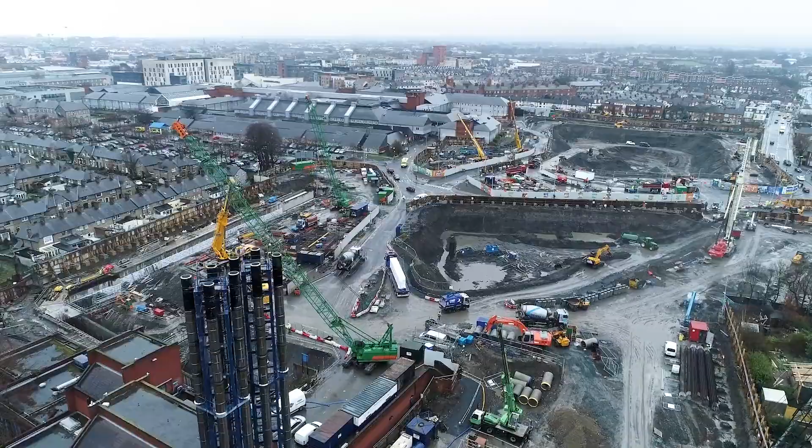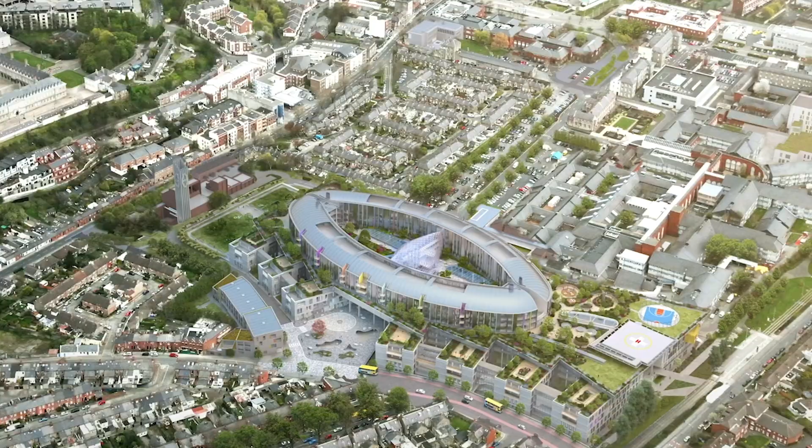When you're finished the project and the hospital opens and you stand back and look up at it, you say, I was part of that. It's really something, and it feels like you're leaving a bit of a legacy behind. So I'm happy to keep doing this for potentially the rest of my career. It's a long journey, but in the end you just have to think about what the finished product is going to be and how wonderful it'll be. This is a standout project in the career of any engineer.

You get a sense sometimes of how important what you're doing is. Ultimately, our client is the children of Ireland and everybody in Ireland, their parents as well. I have young kids myself, and the facilities that are there for them at the moment are not really what we would like them to be in this country. So that's really why we're doing it.

Someone asks you, what do you do? Oh, I work in the children's. Oh, the new children's hospital. Yeah, everybody knows what it is, and though they may not say it, everybody knows how important it is.

I think they talked about building a new children's hospital in Ireland for 40 years or so. And I've always loved healthcare work just because of that. It's complex, it's technically challenging, but also it has that social usefulness aspect to it. You very much feel when you're building a hospital that you're doing something for the greater good.

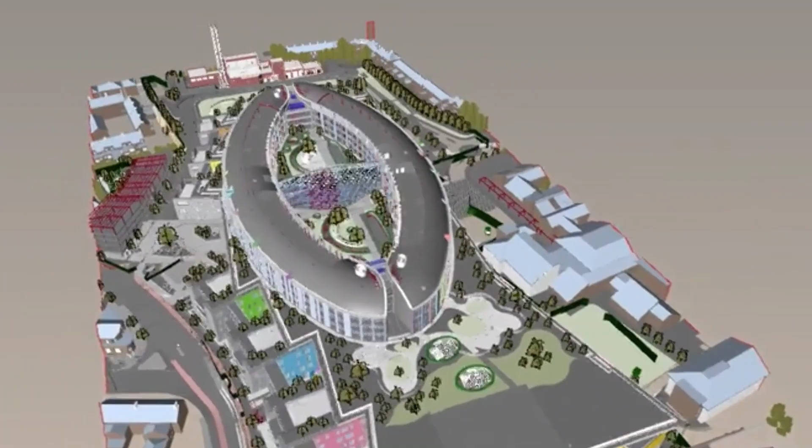But you get a sense sometimes of how important what you're doing is and what it will be. And I see the building coming up higher and higher out of the ground. You get a sense of how grand it will be when it's finished.

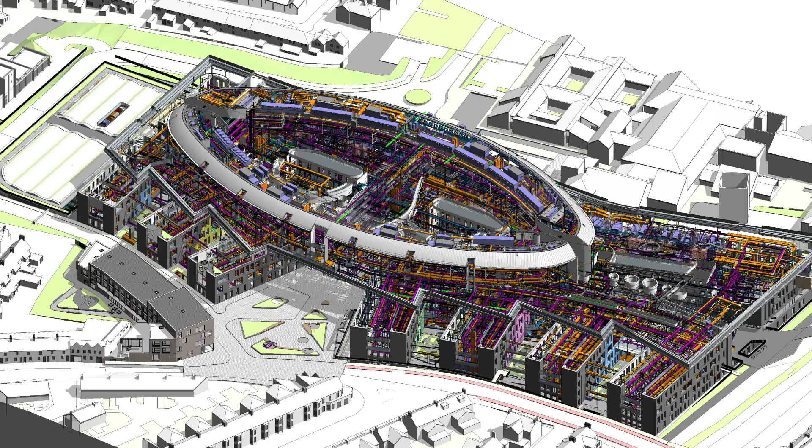So what Jones Engineering bring to this project is, number one, we bring experience, but more than that, we think we bring a culture, we bring passion, and it's a passion to solve problems. It's a passion to get things done right the first time, to come up with a better way to do things. We're always looking to see, can we innovate and can we come up with a smarter way to do something. But it's also a passion to hand over a project that at the end of the day is a world-class facility to the highest standard.

I think my advice to young engineers who are about to graduate is don't limit yourself in what kind of job or sector you've studied your engineering in. They're all quite versatile and flexible. You can switch from one side to another. It is going to take a bit of learning and getting used to, but you're well able to do it. Definitely just don't limit yourself to just your degree and only your degree.

Ultimately, a consulting engineer solves problems. So clients will come to us with problems or challenges. They may want to build a building in a certain place, or a bridge, or design a table, or anything. And it's our job to decide how that might happen. Can it happen in a cost-effective manner? What are the stages that would have to go through to decide, from concept to detailed design to figuring out a price to production, all of those things. So yeah, ultimately our job is to solve problems.

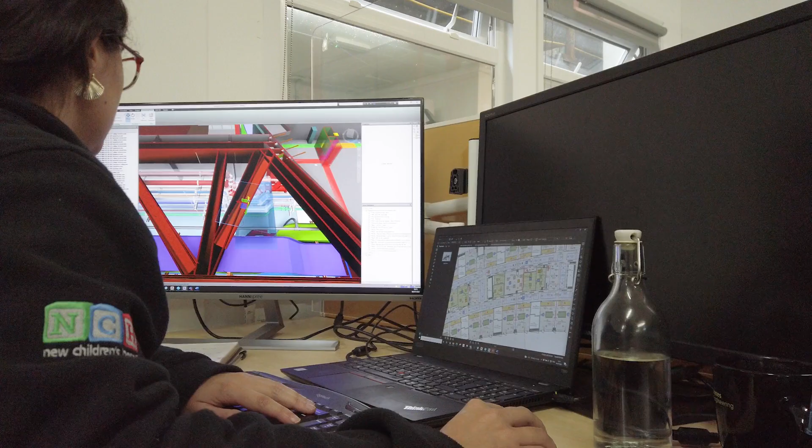I think that many times when we finish college or university we are all very excited about moving into the real world, and sometimes we do believe that we know everything, but it's not really true. Actually, you learn the concepts and you learn how to think, and then you come to the real world, and you are constantly learning stuff.

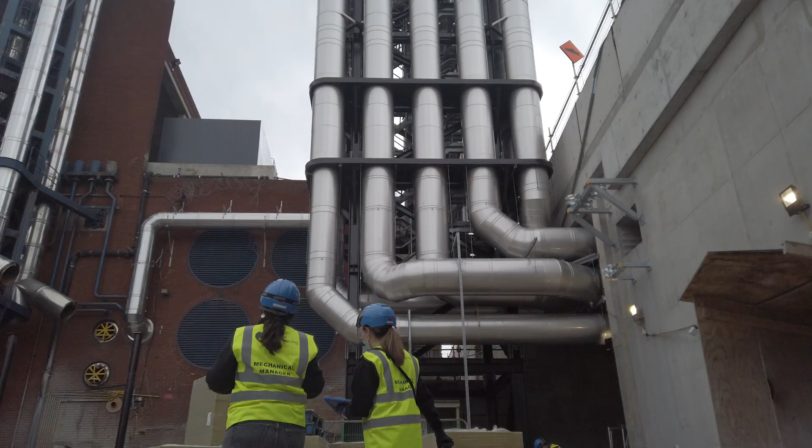And if you have good managers who help you, which we have here, you will start having small tasks, and then eventually they will start giving you bigger tasks, not really on your own, but they give you that freedom of, okay, you have to do this, any question, let me know, but you have the freedom to do it your way.

You have to learn how to allocate time to different things, because there are different jobs within this project, like as a project engineer or as a coordinator, or you have to be interacting with many subcontractors, different trades. You see that it's a huge hospital, and there are many people involved.

I remember when I was in college, or leaving college, I didn't really understand the different roles that were out there in the industry. You could be a consulting engineer, you could be a contractor, you could be a manufacturing engineer, you could be a technical sales engineer. I had no idea what they were. I took a job, my first job was a technical sales engineer, and I just saw it as an engineer, you know. And that turned out to be a really interesting job, which I did for a couple of years.

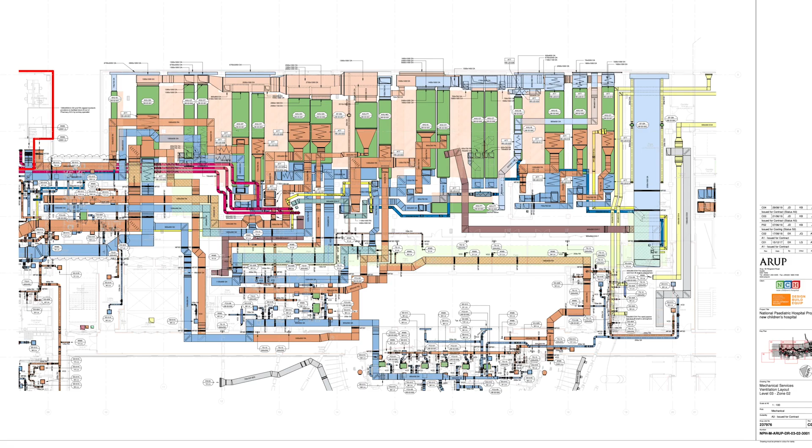But ultimately, the difference between the roles is consulting engineers predominantly design. It's more office based. We spend time on site. As you can see now, I'm on site and have been here for quite a while. But predominantly we're office based, and we produce designs normally in the form of drawings. And then our colleagues, the contractors, actually take our designs and make them into a reality by turning them into fabrication drawings and constructing them and managing the works on site. So that's the fundamental difference between consultants and contractors.

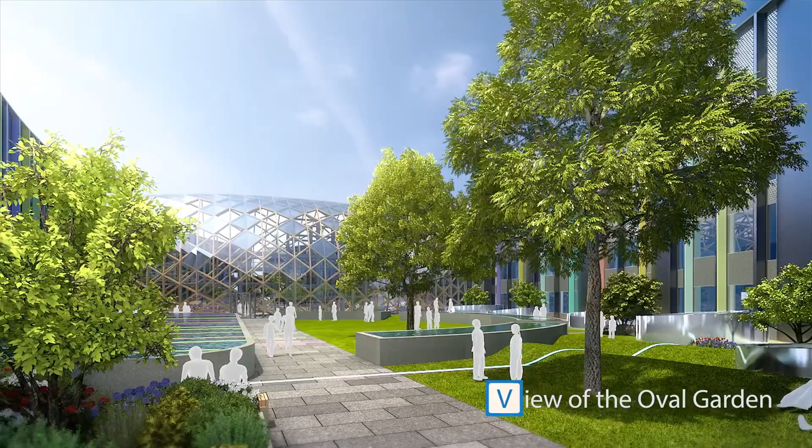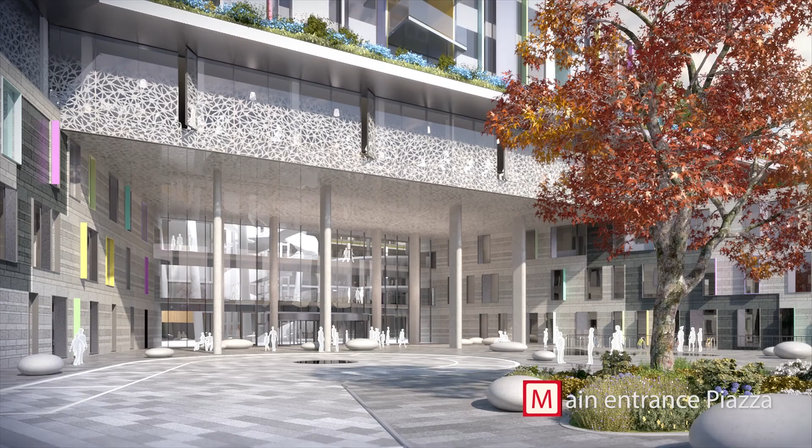And it's a departure, I think, in the design of hospitals in terms of it's all single rooms, so there's no wards. So there's lots of privacy for the children and their families, and in each room there's a bed where a parent or a friend can stay the night comfortably, and that's really important for children. And the whole design is very much focused on their well-being, with lots of light and lots of outdoor space, and all of that hopefully would help the healing process and help them feel more at home and more relaxed in a hospital environment.

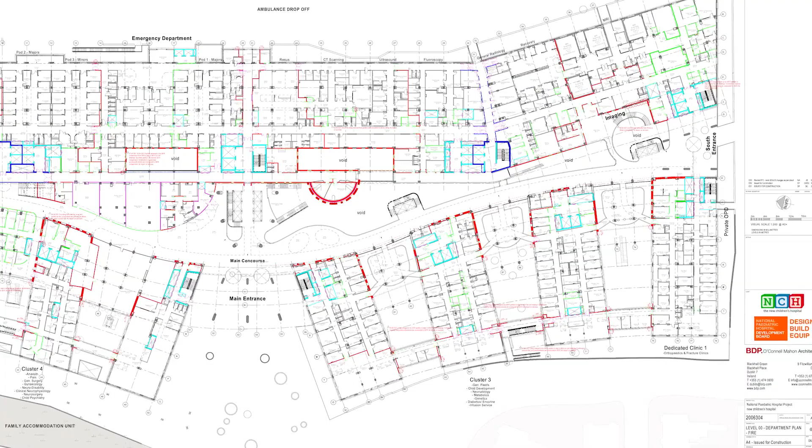So just a little bit about the project itself. I've been personally working on the project for 6.5 years, and I'm really proud to work on the project. I know Arup as a company, we're really proud to work on the project. We pride ourselves as a company that does socially useful work, and no better work to be doing than delivering a hospital. It might sound a bit corny, but I mean that it's really interesting and fulfilling work to do.

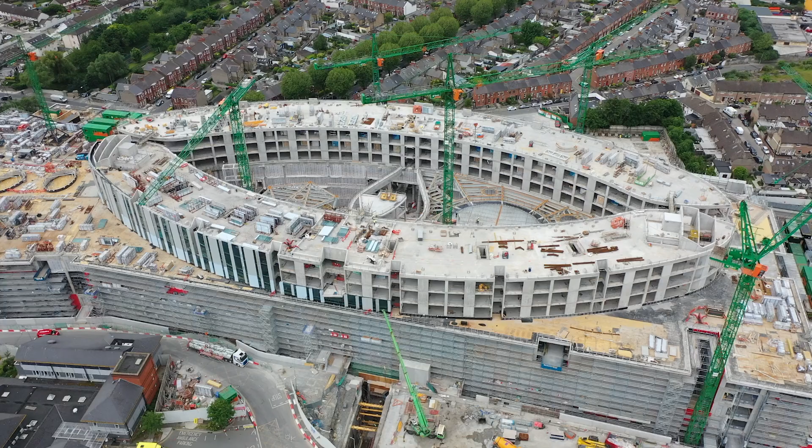I could be delivering different types of projects if I wanted, but I've worked on hospital projects for most of my career, and I think I'll continue to work on them for the rest of my career. They really are interesting projects. They're very technically challenging. They're very complex projects to work on, and when you've finished the project and the hospital opens and you stand back and look up at it, particularly this hospital now, and you say, I was part of that, it's really something, and it feels like you're leaving a bit of a legacy behind. So I'm happy to keep doing this potentially for the rest of my career.

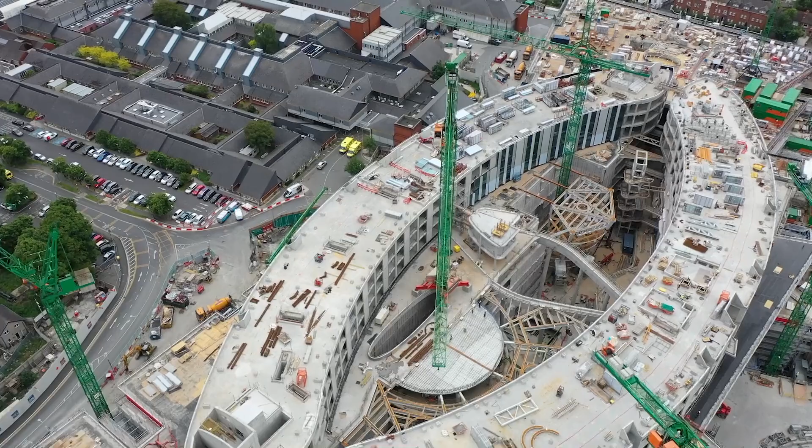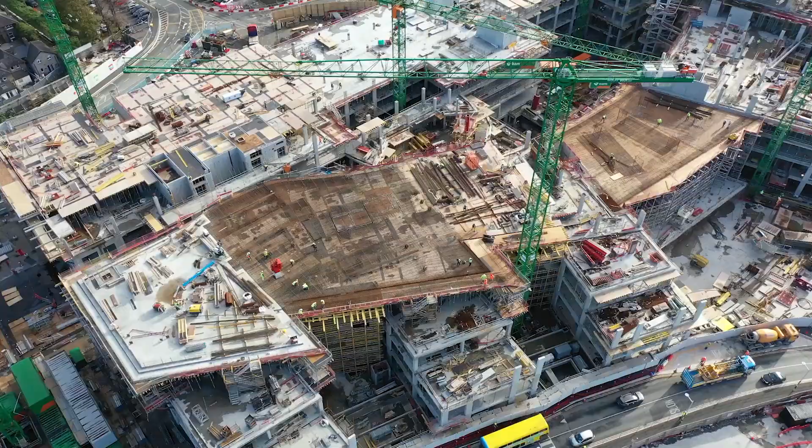The hospital itself, I'm not sure people understand the complexity of it and the enormity of it. The building itself is 160,000 square metres. It's got 6,000 rooms. If you try and imagine 6,000 rooms, that means there's over 25,000 internal walls. Those kind of numbers make the mind boggle. They don't mean an awful lot to people. Your average house, for example, is 150 square metres. So it's over 1,000 of those.

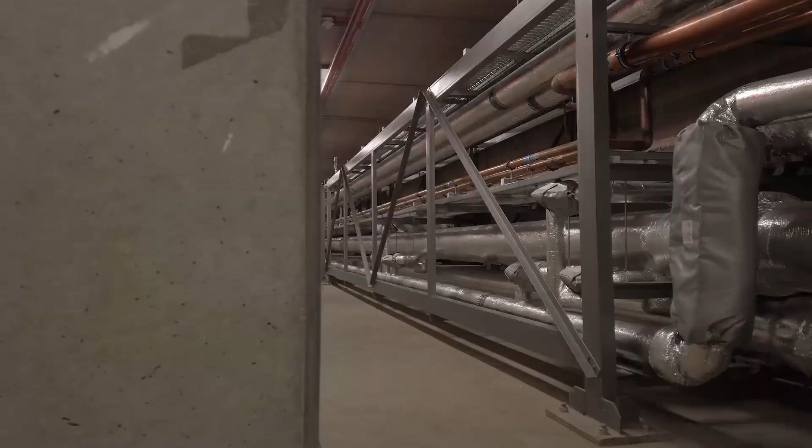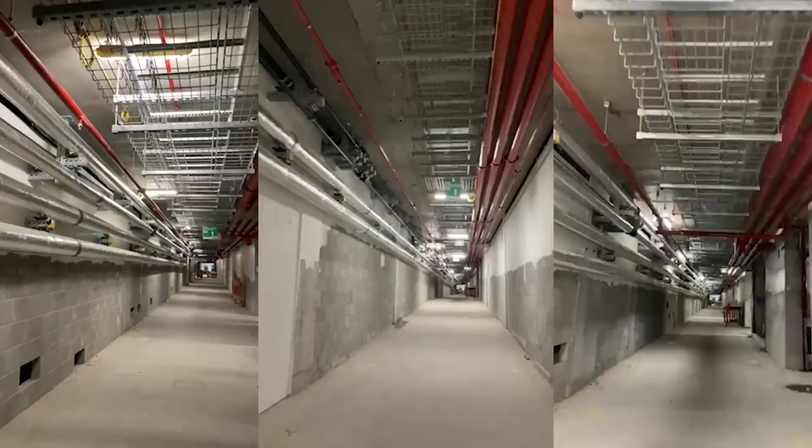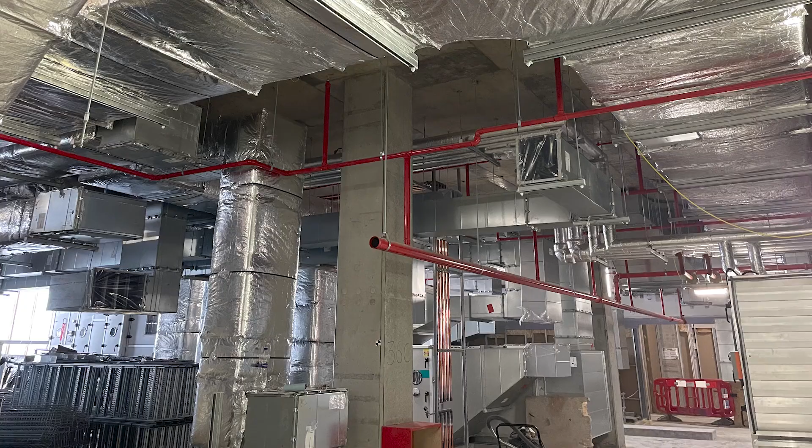There's over 15,000 square metres of plant rooms alone. If you take any of the large commercial office projects in the city centre, the overall building area of those will be maybe 15,000 square metres, probably less. And it's like taking one of those and completely filling it full of mechanical and electrical plant. And that's just the plant rooms. We also have to design all of the arteries that connect the plant rooms to the end user. So there's any number of outlets in any of those 25,000 walls with electrical services, with medical gas, with very clean water to help wash people's blood. Everything you can imagine is in this hospital.

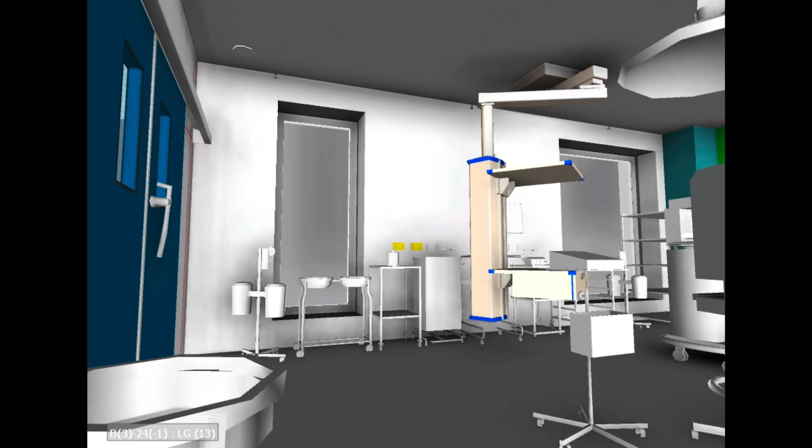So it's our job as designers to design all of those services for the hospital, from the plant rooms right up through the distribution, to get them to rooms so that ultimately patients, who are our ultimate clients, are getting the treatment that they need. The building has over 5,000 rooms. There's 22 operating theatres. There's over 80 isolation rooms. There's 130 air handling systems. There are over 30,000 data outlets in the walls. The building is phenomenally complex and really, really interesting to work on.

If you're an M&E designer, I don't think there's much that a hospital hasn't got. It's got offices, it's got operating theatres, it's got ICT rooms like data centres, it's got kitchens, it's got restaurants, it may have a cinema. It has everything really that you could want to design, and plenty to keep you interested.

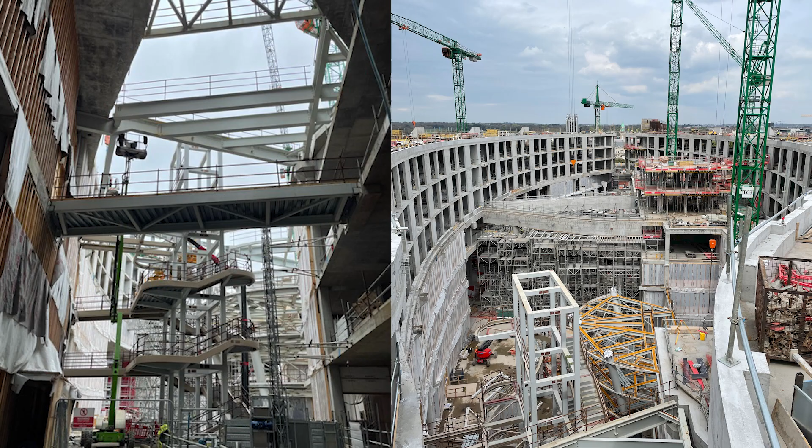So Arup were appointed to start work on the Children's Hospital in 2014, and I started working for Arup on the project towards the tail end of 2014. So it's a really important commission for us, and it's a project that we're really, really proud to be involved in and committed to delivering. It has been tough at times, but we're really seeing the fruits of our labour now out on site.

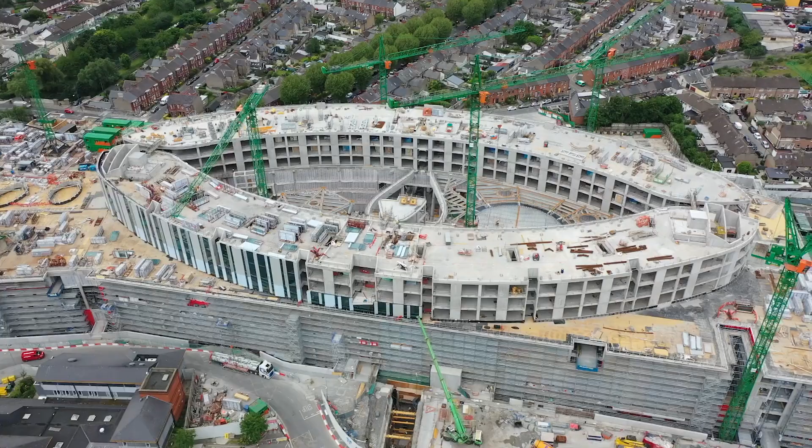The building is now up to level 7, so the structural frame topped out last month, which means that the superstructure is largely complete at this stage. And that's something to say as well.

Over the years, we've had plenty of social events. The team working on this project, the guys in this building, as well as our own office and in BAM's and Mercury's offices, we've all been working together for a long time now. And we're okay, we have our disagreements, but we work together well the majority of the time, and we really enjoy it.

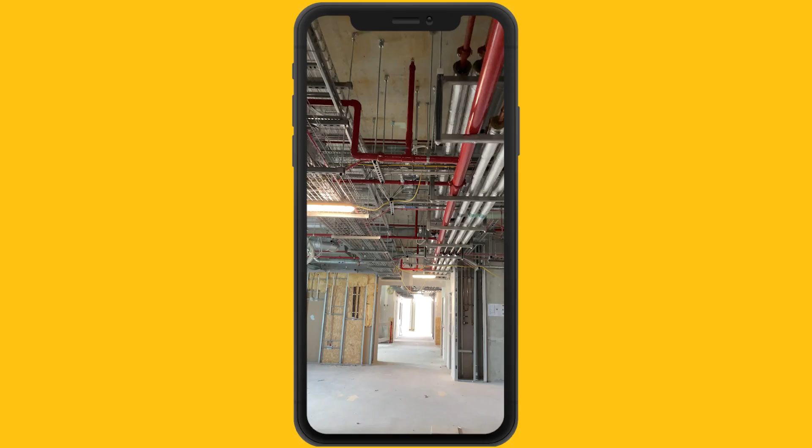So the M&E fit out now is reasonably well progressed. It's probably 20% through at the moment, and there's quite a way to go, but there's a lot of activity out on site now, so it's quite an exciting time to be based on site. And as you can see with the Luas going by now, that's one of the things we have to deal with.

Yeah, so the location here was certainly challenging in terms of the footprint that was available for the building, and it was well, I suppose, publicised that there was doubts about the site and whether it was the right site for this building. And it's not our role or my role to question the site itself or the location of it. It's our role to come up with solutions to make the building work on the site, and in fact to make the site work for the building as well.

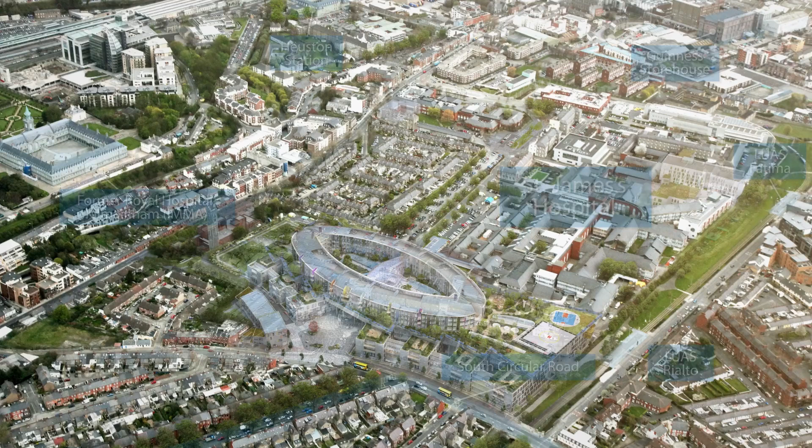The site, obviously, it's a live hospital campus. So there's hundreds and thousands of patients coming into this site on a daily basis, and St James's Hospital could not be affected by anything that we had to do. We couldn't shut down the hospital or any part of it. They had to provide service to patients 24/7, as they do always.

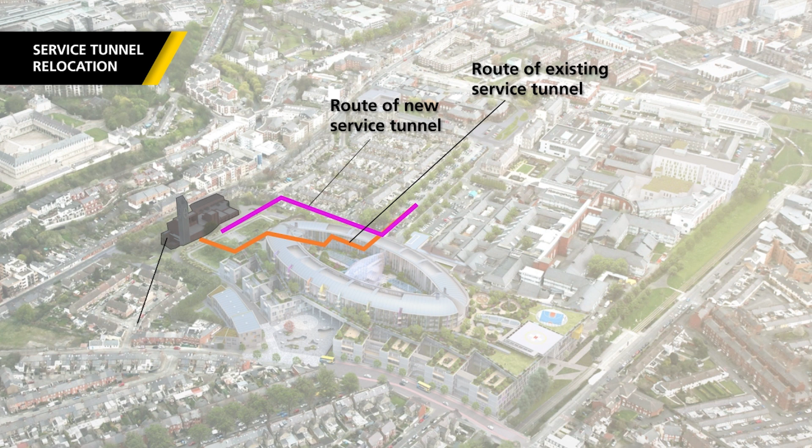And the really unique part of the piece of work that we're going to talk about today is there was a utility tunnel that connected the St James's campus to its energy centre, which is, if you think about it, almost like an umbilical cord, and it transfers all of the critical services from where they're generated to where they're needed. So that's power, keep the lights on, keep all of the machines on, it's heat, it's steam, it's medical gases, it's oxygen, people are acutely aware of how important oxygen is these days, and nitrous oxide, and various other critical services.

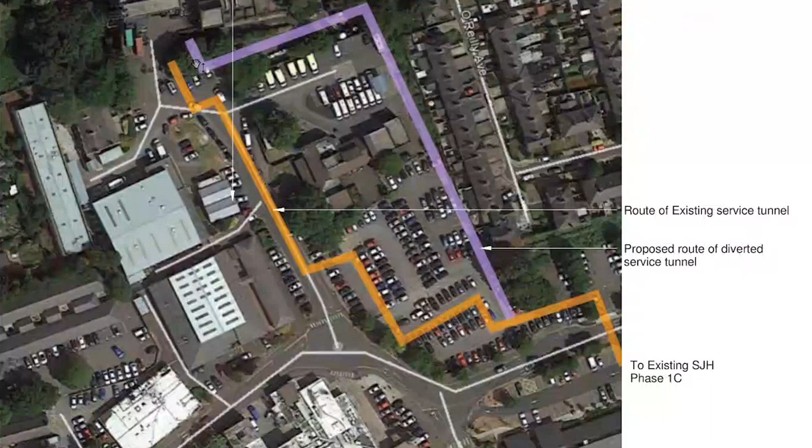And the problem that we're talking about today, that we had to work together with Jones Engineering to solve, is that this tunnel ran through the site for the new Children's Hospital. It ran underground and directly through the route where we needed to excavate to get this building started. So before we could even start, we had to crack this particular challenge. Initially, it's about coming up with a concept, right? So that's really our role at the start.

I heard people say that this couldn't be done. I'm pretty sure I read it in the newspapers actually, that this couldn't be done, that there were so many critical services, the Drimnagh sewer and the utility tunnel running through this site, that it just wasn't suitable for this hospital, and it would really be an almost impossible challenge to do what we had to do. But our job is to make that possible, right?

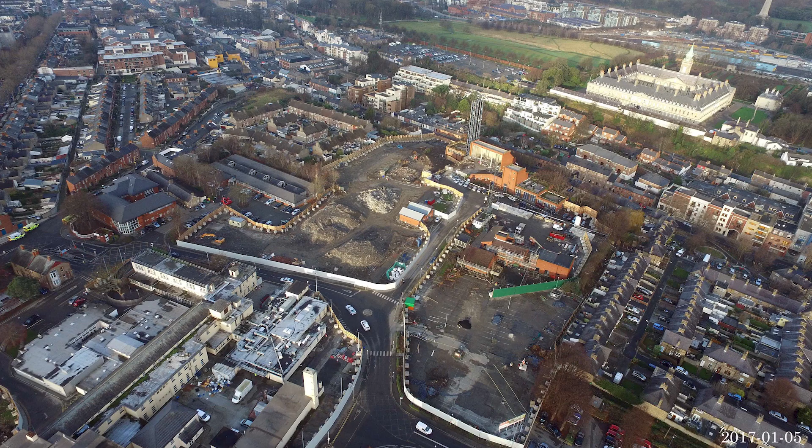The first thing that we do is we go and visit site. So it's hard to imagine, but there was a first time that I visited this site, and it was about 6.5 years ago at this stage. It was cold. I remember there was 22 old buildings on the site where the hospital is being constructed now, and there was obviously this utility tunnel running underground through the hospital. So the first thing we do is we go out, we survey the site, we familiarise ourselves with where everything is, where everything connects into.

Obviously we bring in some specialist companies to help us survey underground to try and figure out where everything is going, where it starts, where it ends, and that allows us to build up a picture of what the specifics of the problem are.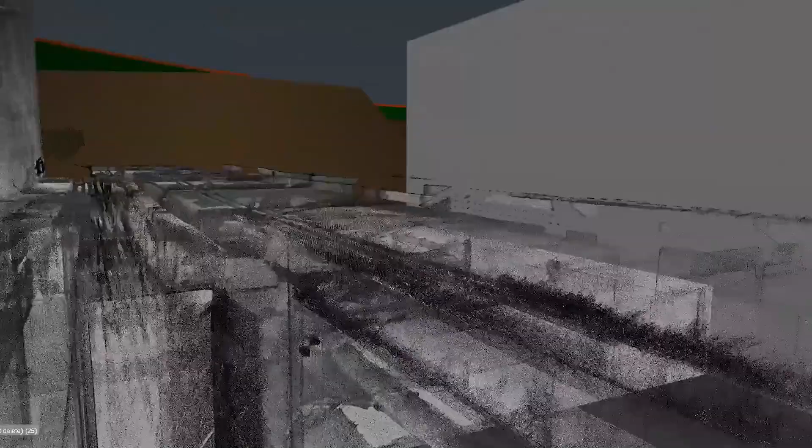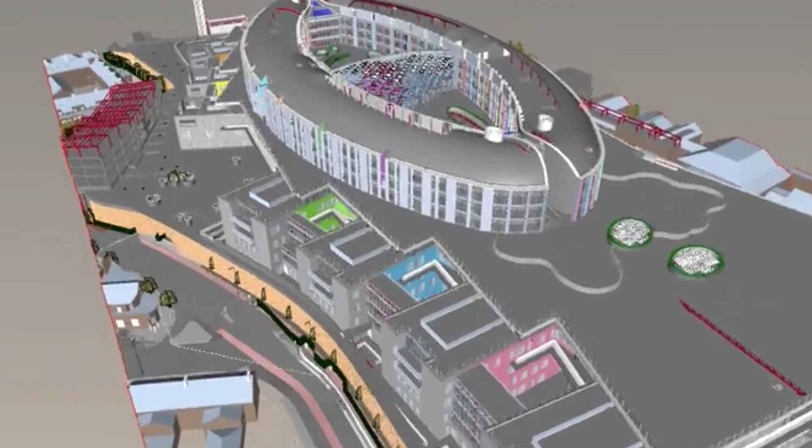And I often think it's almost like a photograph that has very poor resolution. So we start with a concept which is the bones of a solution. It's not very detailed, the resolution is not very good, and as we move through the stages of the project, the resolution gets better, gets better, gets better. So we learn more, we provide more detail, and by the time we get it to the stage where it's ready to be constructed, we've got pretty much all of the detail. We've got everything that the contractors need to build.

So yeah, there would have been an initial information gathering stage, let's call it that. And ultimately, if we imagine a situation where we have an underground tunnel running through a site that we need to clear, I think any of us here could come up with the initial concept. The tunnel has to go around the site. So we looked at a couple of potential routes as to where it would go, and we decided pretty early that the tunnel needed to run east to the northeast corner of the site, and then south to join back up outside the footprint of the new Children's Hospital. And so that was the initial concept 101.

What we had to do then is try and understand, okay, now I've got an idea, is it feasible? So we need to produce what people refer to as a feasible generic design. So it needs to work, it needs to be possible, and it's based on generic components. So we can't specify it must be that exact type of machine. We've got to be able to do it in generic terms so that the contractors can procure from different sources. Okay, that's something we have to work within.

So now we've got an idea and we start to develop: okay, well, are the levels correct? Can we get the tunnel physically far enough underground, and will it bump into anything as it's coming along that route? And if it does, how do we divert that? So we go through a whole stage of working with other consultants then. We work with the architects, the civil engineers, the landscape engineers to try and figure out if our initial concept is actually feasible.

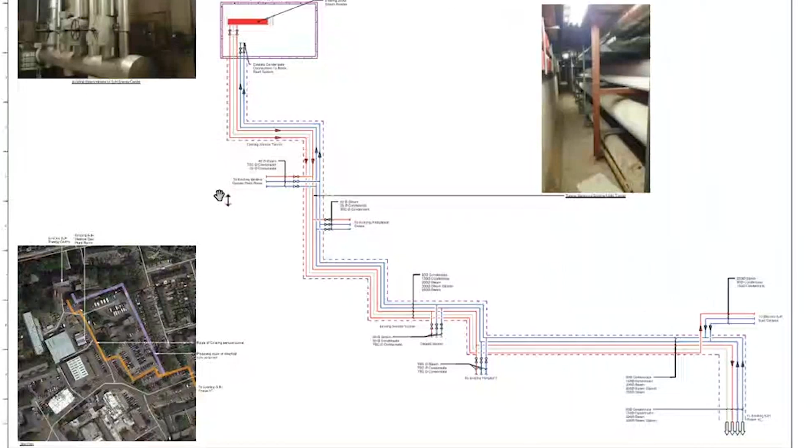And so we had to survey the St James's Energy Centre to see, is there a part of that building that's low enough that we could feasibly break through the wall from underground and create a new tunnel and connect everything back. And so we determined there was, we picked a location, and we came up with an initial set of concept design drawings, which we used predominantly to agree the scheme design with the key stakeholder at this stage, which was St James's Hospital campus, because they own the services, they're keeping their hospital live, we're doing open heart surgery on it effectively, and we needed to get their agreement with everything that we had to do.

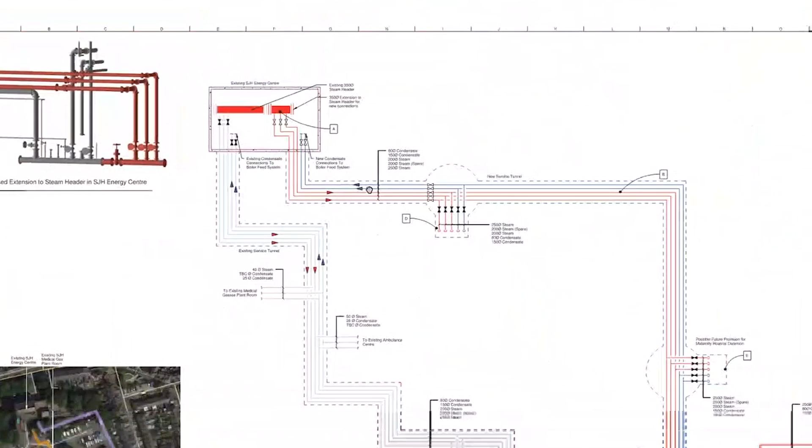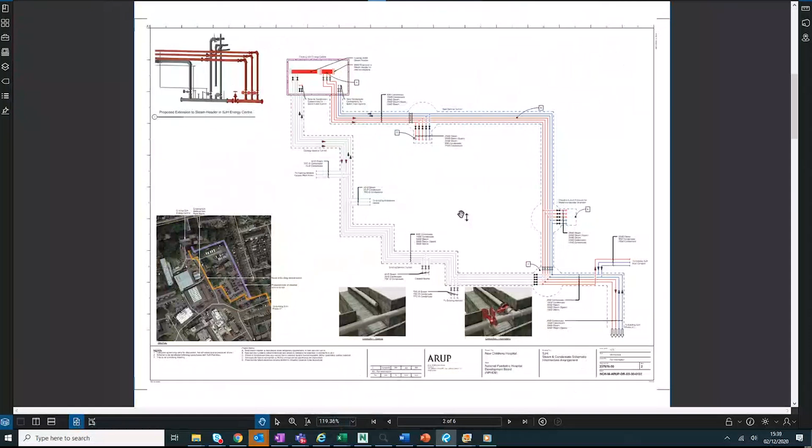We produced an initial set of concept drawings for all of the main services, so for the electrical services, steam, medical gases and so forth. And we set them up in a way where we showed schematically existing, the next page would be proposed intermediate stage, and the next page would be the final stage. It's very basic, but you could flick from one sheet to the next on a projector, and it was very clear to this client what was changing at each stage. So, we would add a new bit, we would make a connection here, we would run services here, we would make a changeover at this point.

And we had to demonstrate to St James's that we could do it in a way that would be safe, and that it would not cause an interruption to their operation of the hospital. That was just a no-go. We could not do that. We couldn't interrupt the services.

And we had to give them confidence that we had designed it in such a way that this could be carried out as we had designed it. So we sat in long rooms like this with our drawings up on the screen. All of the people from the St James's Technical Services departments, their Director of Capital Projects, all of the key people over there, including clinical people as well. So you would have some of their clinical engineering leads and people who understood what it meant if their oxygen supply turned off, for example.

Yeah, so to give the St James's team confidence that the solution that we had come up with was buildable and could be implemented in the timeframes that would avoid any downtime on their systems, we collaborated with contractors prior to having the meetings, and we were able to demonstrate that we had thought through the turnaround times for controlled shutdowns and for switchovers between one service and another service and backup services and that type of thing.

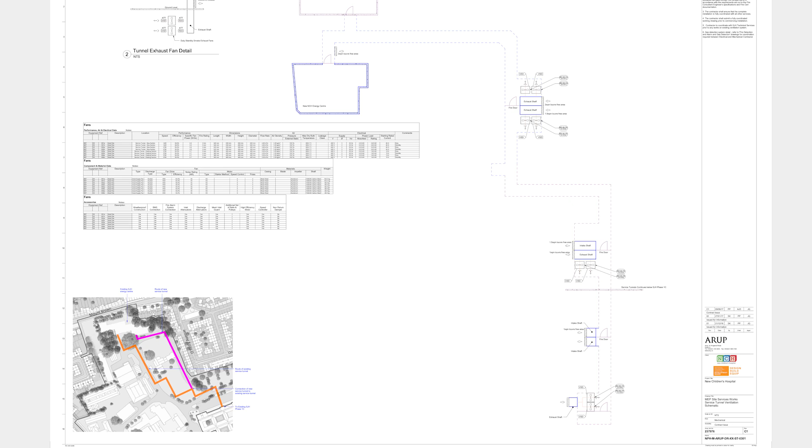Okay, so really where we're trying to head here is to try and engage. We want to be able to now contract this piece of work to a team of contractors who can actually implement it. So the next stage of the project that we need to move to is developing a tender design. Okay, and what tender means basically is a design that can be priced, it can be costed. Contractors can provide a price to go and deliver this piece of work, because now that we have a concept agreed and we know where we're going, we need a contractor now to build this for us.

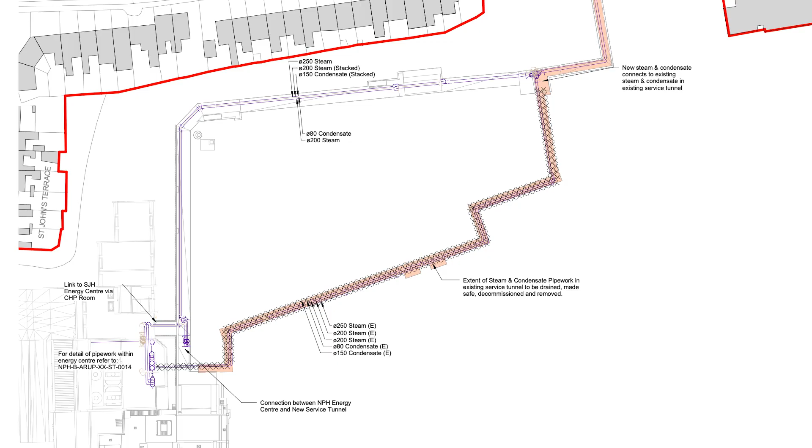And with public projects, the way they're procured, you've got to advertise it online. You let contractors tender for it in a fair way. And we need to produce a very detailed set of design drawings now, or tender drawings as we refer to them, so that all of the contractors get all of the same information and that they get a period of time to assess those drawings, measure them and come back with a price.

So all of the contractors submit their prices for the work, and the contractor with the most economically advantageous tender wins the project. So not necessarily the cheapest, they have to demonstrate that they've thought through the methodology of how they're going to approach the works, and they get points for that, as well as getting points for having an economically attractive tender as well.

So we need to take our concept drawings at this point and develop them into something more detailed. So we need to add all of the valves, we need to add all of the right pipe sizes, we need to add all of the material specifications, we need to add all of the accessories that aren't necessary at concept stage. So when we're agreeing a concept with the stakeholders across the road, they don't really mind if there's 2 sets of expansion bellows or 1. They just know you've got to have them, you've got to have thought that through.

But for tender, you've got to have designed all of the valves, all of the accessories, so that they can be counted and all of the contractors can price them in a fair and an equivalent way. So it's taking the concept and it's developing it into a detailed set of drawings that plugs all the gaps.

And as well as your drawings, you produce specifications, which are documents which list out all of the material specifications, all of the constraints, all of the duties that the contractor must carry out, everything which will cost money effectively, and everything which is required to complete the work. So we prepare a big pack of drawings and documents, mechanical and electrical, which go together and they're sent to the contractors to price.

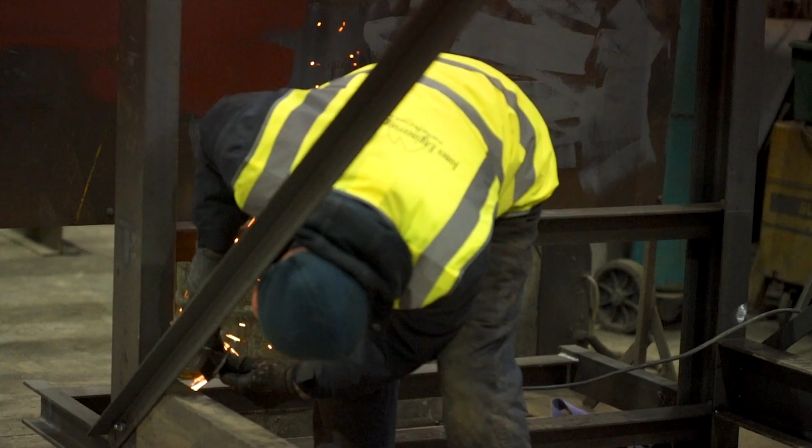And if you take the likes of the utility tunnel that we worked on here, the major concept really was modularization, and that's mainly based around speed. So are you going to just get all the materials delivered here to site, or are you going to actually get them delivered elsewhere, put ours off site and bring finished elements to site? And it sounds slightly trivial, but that's a major decision you're going to make.

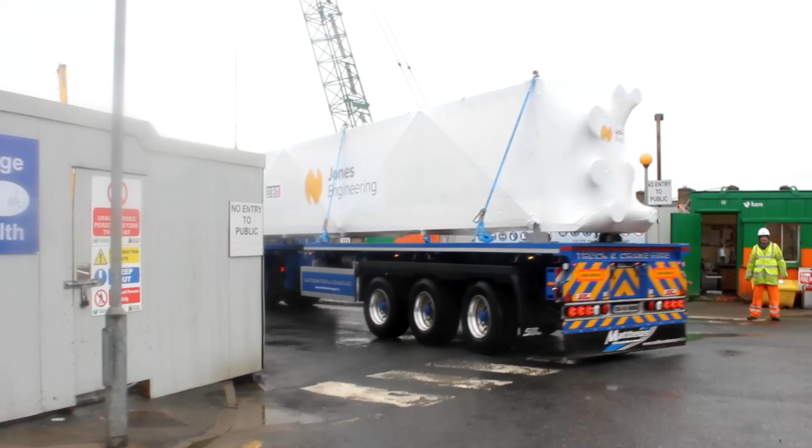You're going to need off-site premises, you're going to need insurances, you're going to need logistics, additional transport over and above. The level of coordination that's required is going to have to be probably an order of magnitude higher, because everything has to come correct. There's no bring it here and sure we'll fix it, because that just defeats the purpose of what you were trying to do in the first place.

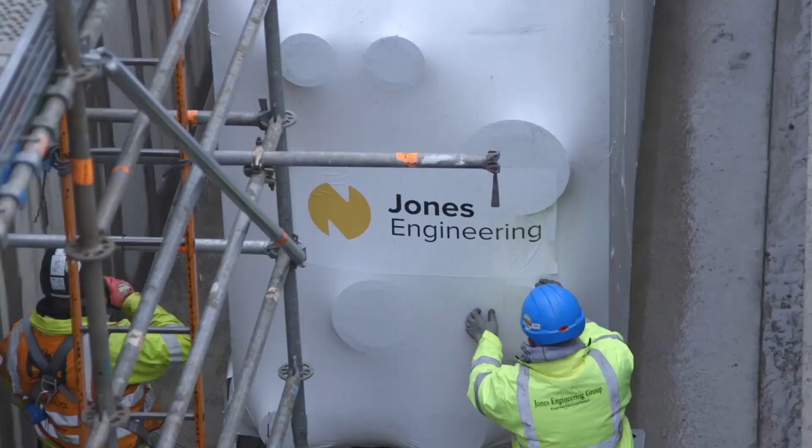So more and more as the industry tends to go in that direction, the more and more accurate you have to be. People coming straight out of college, there's not really much time to come up to speed. You've got to kind of be there from the get-go and get in with a more senior engineer and do your best to play catch up and roll with them.

Yeah, so one of the things that we try to employ when we are doing a review of the design is a simplification of it.

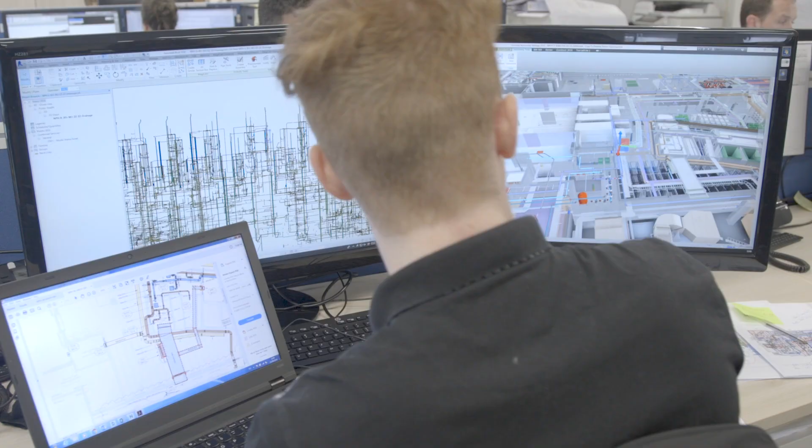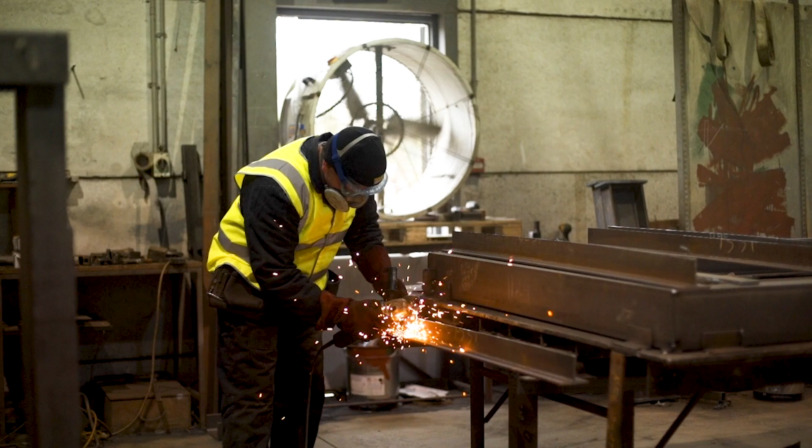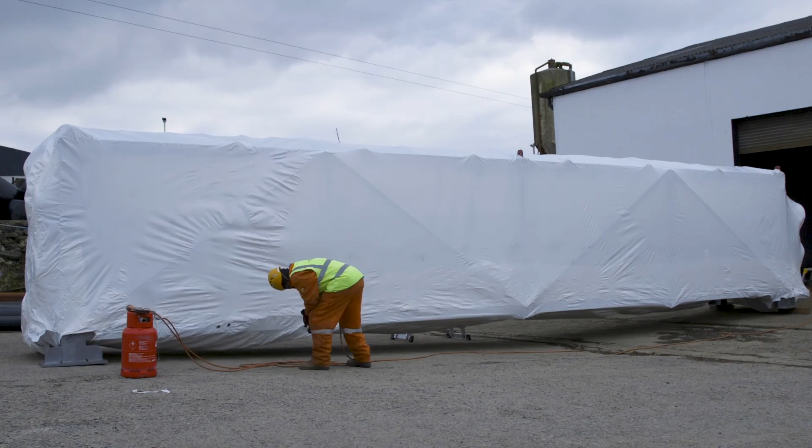A pipe that runs in a straight line is far simpler and easier to install than one that has multiple changes of direction. From a cost point of view, but also from a system operational point of view, there are benefits to everyone from simplification. That really leads into how we think about offsite fabrication, where we're endeavouring to provide compact, repetitive items delivered to site, high quality, low issues. The simpler we can make these things, the easier it is to repeat them, the fewer issues you have, and that leads to higher quality and reduced time overall.

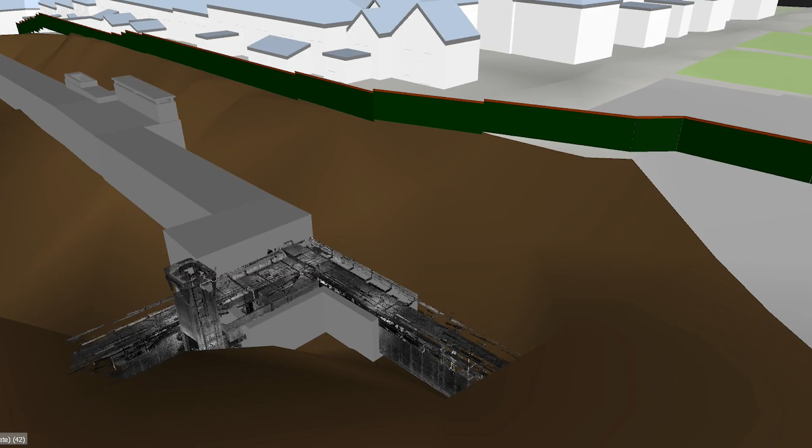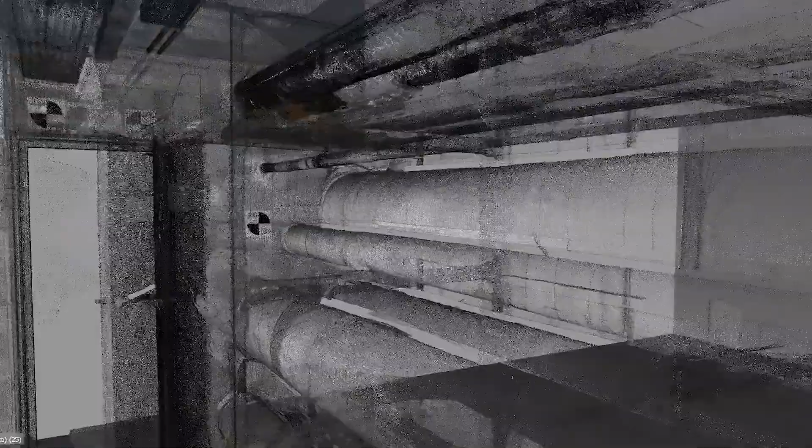To facilitate the speediness of the shutdown works, we needed to prefabricate as much pipework as we could. In an already installed environment, it's very difficult to provide accurate prefabrications because you're relying on what you can see and measure and the accuracy of that. So the entire junction where the cut-in was going to take place was 3D scanned with LiDAR, and this provided us with an accurate base point that we could insert into our model. We probably saved in the order of 4 to 6 hours of work on site, and that's 4 to 6 hours of real time of a hospital losing their heating system that was saved.

In the case of this project, off-site manufacturing was deemed an absolute necessity over a nice to have, due to a number of factors: the restrictions in and around this relatively tight site, but also, and more importantly, from a quality point of view, where it's far easier to control quality in a controlled off-site fabrication facility. There's a number of other factors that go along with that: reduced health and safety concerns on site, reduced issues due to inclement weather.

One of the most critical things identified early on was how the diversion of the steam systems would be handled. The steam is used to provide heating to a large part of the existing hospital, as well as hot water services, and as you can imagine, turning these systems off is life safety critical for patients. So it had to be handled in a very controlled manner. This was done through writing a very large method statement document about how the process would be done and how it would impact on the hospital especially.

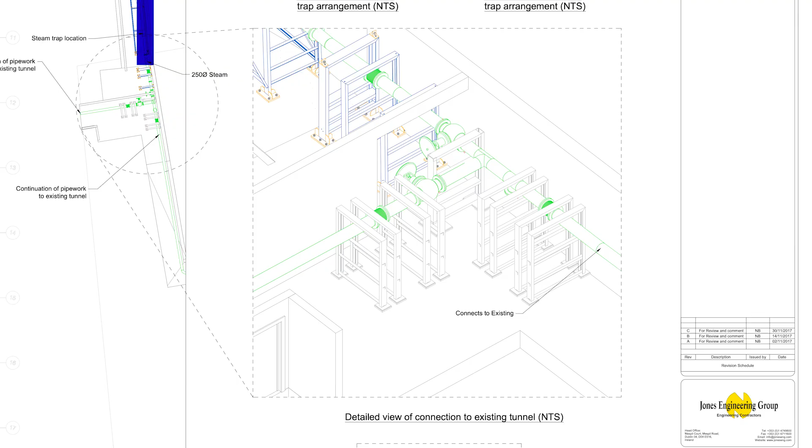There was a location identified where the two tunnels would connect, and at this location we had to cut in several T's and valves to facilitate the diversion at a future point. This was done over the course of 6 Saturdays, normally through Saturday nights, to provide the least disruption possible. The hospital identified this as the best time of the week to do it, based on the very low number of surgeries likely to happen on a Sunday morning.

So we would shut the steam system down, allow everything to cool down and the pressure to drop. We would then cut into the pipe at the identified location and add in what was required with the additional valves. This typically took in the order of 6 to 8 hours, and we would work through Saturday night into Sunday morning, maybe finishing about 2 a.m. So by 8 to 10 a.m. Sunday morning, the heating systems were available again to the hospital.

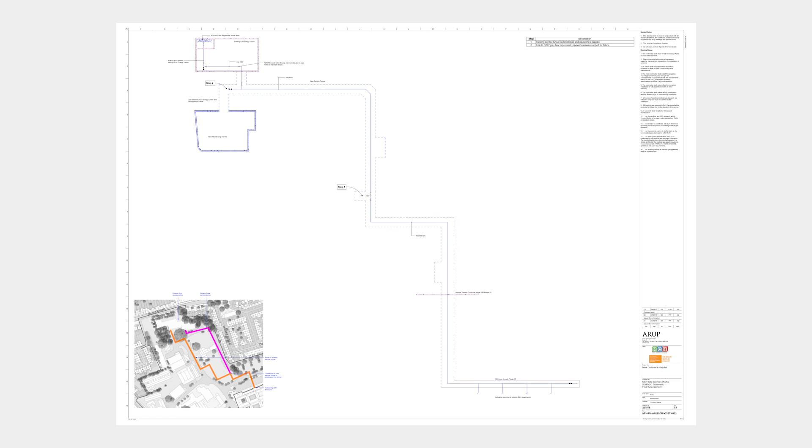In addition to the steam systems that serve the hospital, the utility tunnel is also home to a number of medical gas services, including medical or surgical air and nitrous oxide, laughing gas. These two systems are critical to the health of the patients within the hospital, and one of the critical milestones we had to carry out was a diversion of these two gases. There were no additional valves for us simply to tie on, so we couldn't just plug in and close a couple of valves to change it over—we had to completely shut the system down. These services provide air to ventilators and other critical surgical devices within the hospital, as well as the nitrous oxide used for anesthesia.

So the system had to be shut down, and inside the hospital about 100 cylinders of gas were brought in, all plugged in locally to provide services to patients while the works were taking place. Again, this was done in the middle of the night, finishing around 4 a.m. to provide the least amount of disruption to the hospital.

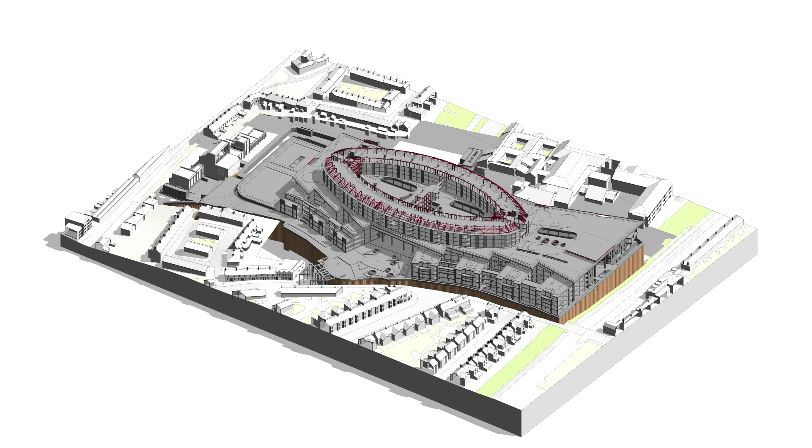The project here is utilising BIM as a resource. More and more, the industry is moving towards 3D software as a way to provide accurate installations and reduce issues that arise on site from clashes, and this was the case here.

The project utilizes Revit, but also for the utility tunnel we used another software called Plant 3D to be able to better facilitate prefab off-site.

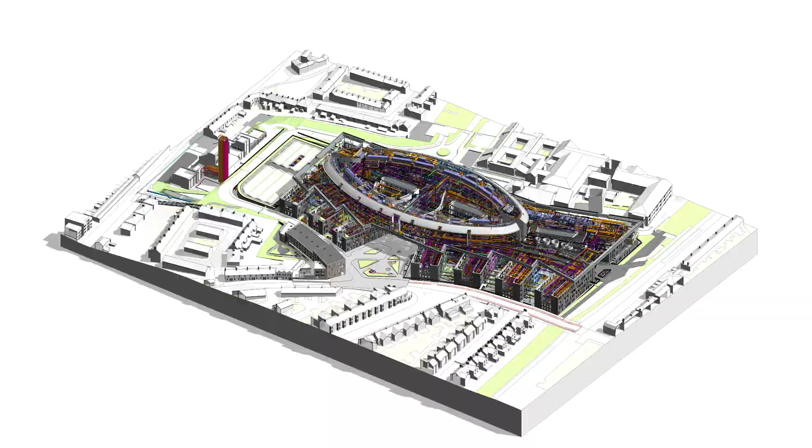The design concept model that we get from Arup really acts as a schematic, so we know what needs to go where, which is the most important thing to fulfill the design.

The entire services within the tunnel are each meticulously modelled in 3D, not just the pipes but all of the supports that go along with them. Once it's completed and we're happy that it all works and flows well and is as optimized as it can be, it's then broken down into modular sections, drawings are produced for these sections, and that's taken away and fabricated off site.

But the model, in addition to providing the information required to build it, really gives a level of reassurance and a check on the design that everything works. At the end of the day, a tunnel is a closed box - you can only fit so many things in it, plus you have to fit people in there as well. So it validates at a very early stage that there's not really going to be any fundamental problems on site, and it gives everybody confidence to move forward to the construction phase.

One of the key considerations we have, especially as time goes on, is the reduction of waste and optimization, not just for the environmental sake but also from a cost point of view - it's beneficial. So when we look to modularize, we try to use as many standard components as we can. For example, pipe that comes straight from the mills in Asia typically comes in 6 or 12 meter lengths.

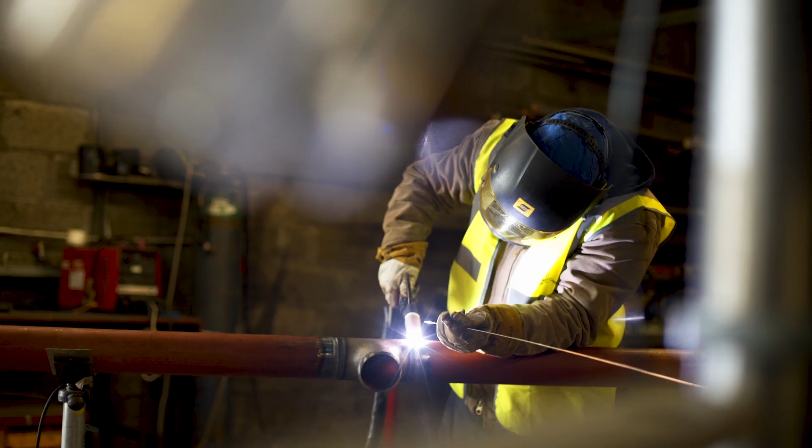You can make a module any length you want, but you can end up with a load of offcuts that have to go in the bin. So the actual modules were manufactured around the standard lengths of pipes. It leads to less waste, less work on site really, and is beneficial overall.

These models contain so much information, but information is no good if you can't communicate it. And the currency of communication is still 2D drawings.

In the case of this system, but really in all systems, one of the key considerations for pipe install is how to deal with thermal expansion. In the case of steam, because you're operating at higher temperatures and pressures, this is especially so. The system as a whole is sent out to an expansion specialist, and they provide the critical locations and information about where we should allow for expansion and how we should restrict the pipe movement.

Really, it comes down to where do you not want the pipe to move, and where do you want a pipe to move, and what the loads are going to be as a result.

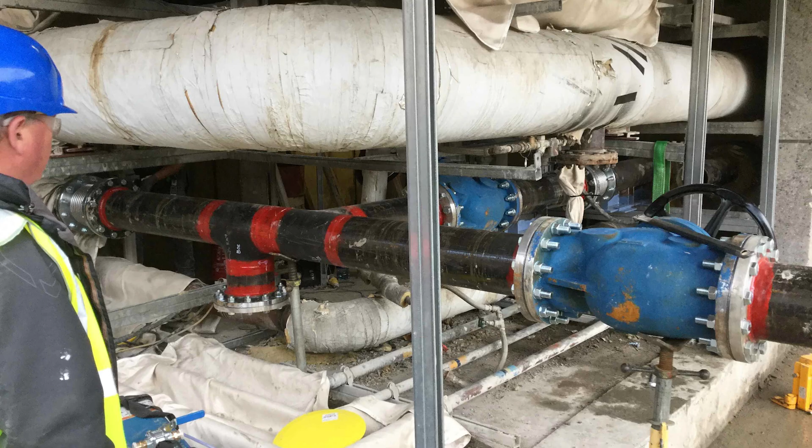So typically you end up, a simple example would be where you have an expansion bellows and an anchor in between, and you allow the pipe to expand into that bellows in a controlled way. If you were to not provide any expansion control and simply turn on a system, materials expand, materials move, but they will do it in an uncontrolled manner in a way you can't predict, and it could damage the system or an adjacent system.

So it's critical that this check is done, and not only done but incorporated from a very early stage, which was the case here, where we can incorporate the expansion design into our modularization. Again, it's just another element that comes to site already complete.

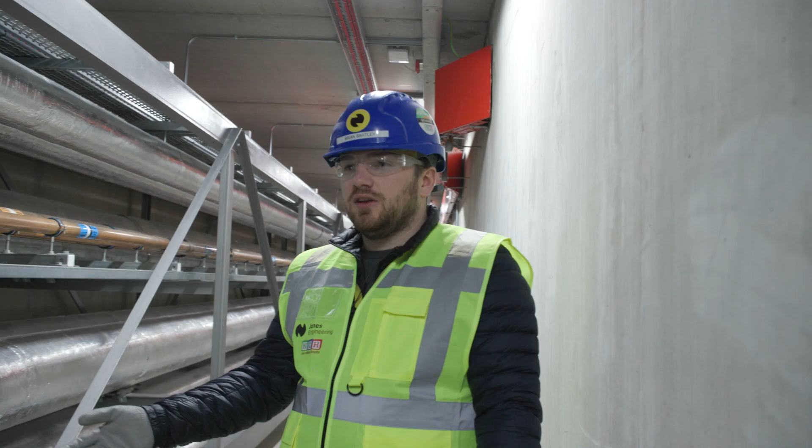So the thermal expansion design that we've mentioned before, here we can see it now in action on site. Typically between each of the 12 meter modules you'll see a set of axial expansion bellows, and these allow the pipe as it heats up to move and expand in a controlled manner to a set location.

The bellows are then guided by pipe guides to restrict any lateral movement that could cause the bellows themselves to buckle. And then to the left of the bellows, you see the pipe physically anchored, welded in this case to the frame, to restrict the movement at that location. That setup is typically repeated throughout the entire tunnel.

The real work starts when you have to start installing services on site, and it's the quantity and the quality of the decision making that you make that will really dictate how the project goes.

You have subcontractors or labourers relying on you to provide them direction, and making key decisions to change something along the way, though may be painful, will ultimately benefit the project in the long term.

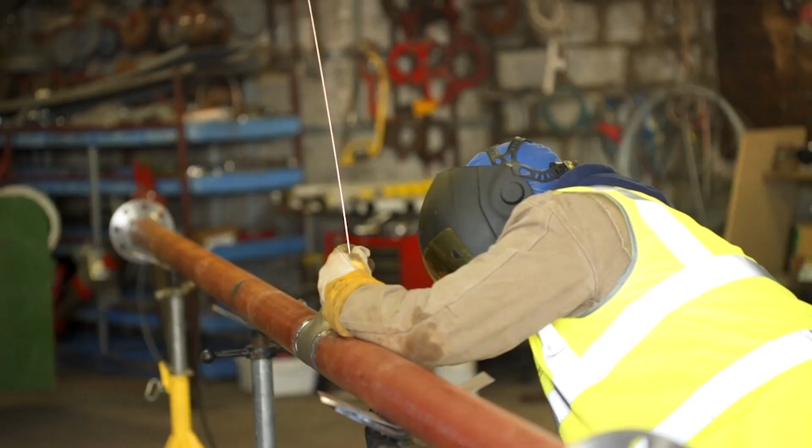One of the benefits of prefabrication on this element of the project, given the amount of welding required, is a significant reduction in on-site welding. Welding can be slow and laborious, particularly without great access to where the weld is required. Doing these welds in a workshop means generally higher quality, quicker work, and less risk associated with fire, since welding is carried out at great temperatures and fire hazards on site are particularly important.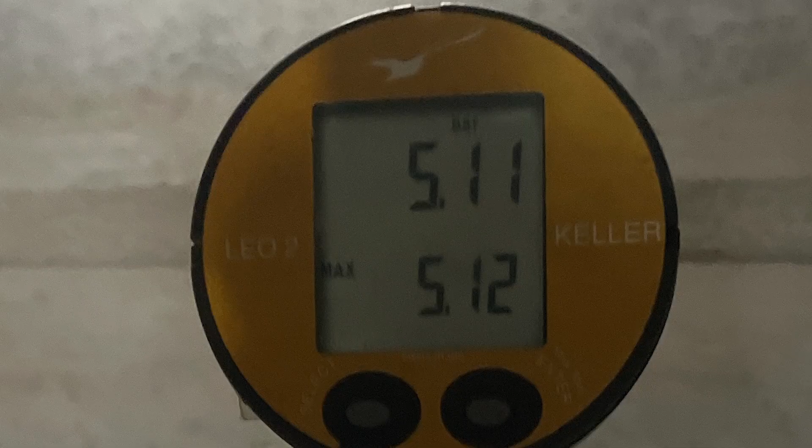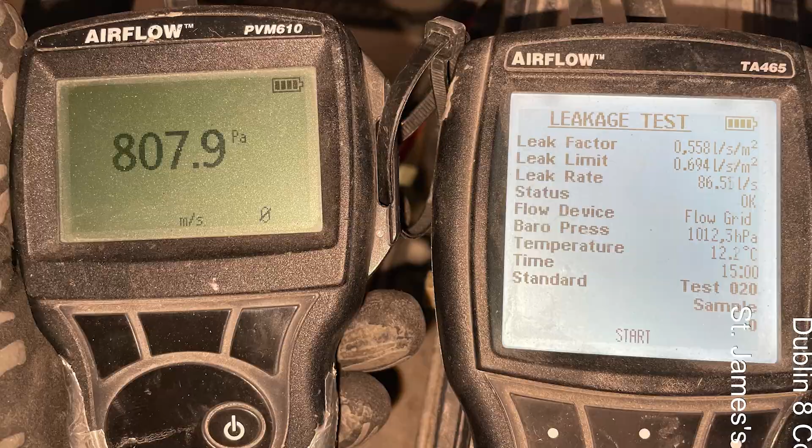In some ways, once installation is complete, the most difficult work of the project actually starts, in the testing and commissioning phase. With any pressurized system, all the systems have to be pressure tested to a set pressure over a number of hours, and this determines if there's any leaks within the system. Unlikely there would be, given the high level of quality, but if there was, this would detect them and they could be remedied. Once the system is practically complete, you're ready to move forward to the commissioning phase.

In this case, because the existing plant was already live to an operational hospital, this had to be done in a very controlled manner. It was critical that we didn't interrupt any service to the live hospital while we underwent these tests. Unlike the shutdowns we did late Saturday nights, these were going on midweek while there was surgeries and everything else happening within the hospital. So we were satisfied that the system operated correctly, with no leaks caused by thermal expansion within the system, and we were happy enough to proceed towards the changeover.

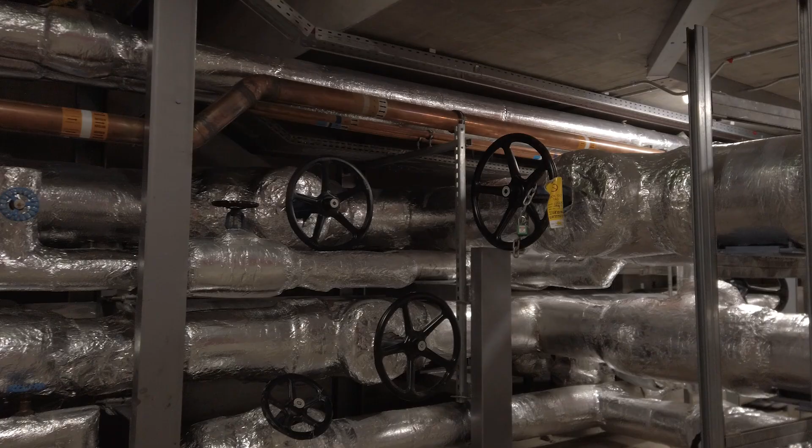And like before, it was done over Saturday night, Sunday morning. The existing plant was shut down, and all of the changes were made to allow the system to flow through the new utility tunnel. It was brought up slowly, and that's very important with steam. Steam, if brought on too quickly, could cause thermal shock to the system, uncontrolled thermal expansion, or steam hammer, which could result in an actual rupture of the pipe. So you're bringing the temperature and pressure up slowly over maybe an 8 to 10 hour period.

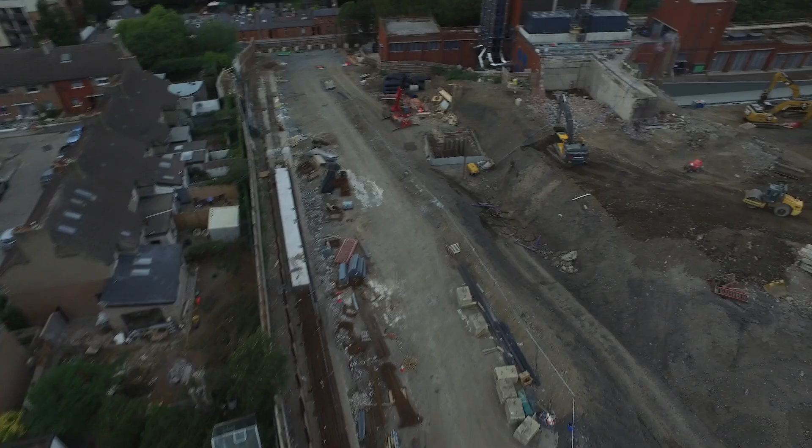At that stage you are live to the new hospital, and all of the services that flow through the old tunnel are now redundant. In addition, the med gas and electrical services are all brought online, and now the links to the old tunnel can be severed, and the old tunnel can be demolished and taken away. Meantime, the hospital has operated regardless, and no disruption to service was seen by any patients.

Really, the challenges associated with this project revolve around primarily its location. You're adjacent to an existing live hospital, in a very busy part of the Dublin suburbs, with houses on all four sides of you, very close residents. You've got the Luas going past every 15 minutes, and everyone has to bear consideration towards that. These people will still all be here when the building is finished and we're long gone, so there had to be a rapport built up with the neighbours, and I think it's managed well. We try to do the best that we can in terms of noise, pollution, or dust.

Certainly manufacturing off-site, you're reducing the number of bodies here on site, and it all feeds into a kind of holistic way of building.

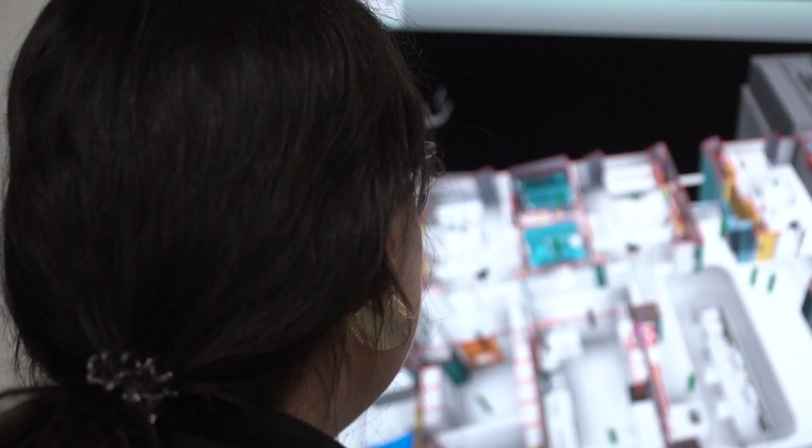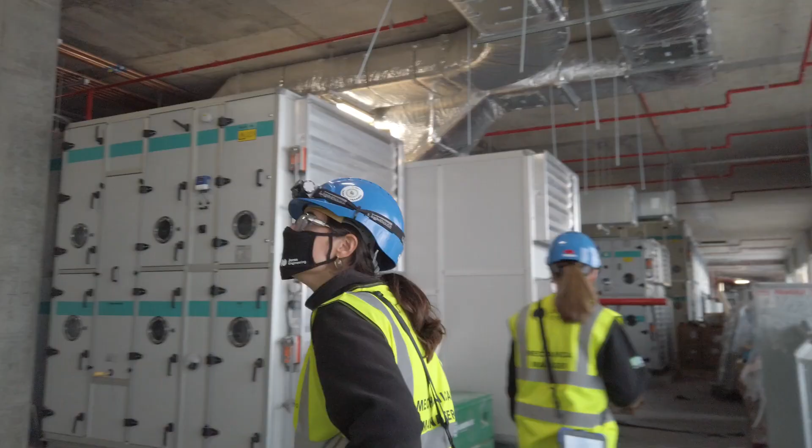Just what you learned in college is important, very important. It helps you thinking, but don't be frustrated if you don't get good marks, because in the end you are gonna go to the workplace. You are gonna learn there what you have to do and how to do it, and probably the top in the class of your promotion wouldn't have the abilities or the interaction with people that other person who has lower academic grades have. So just take it as, alright, I have to learn all the maths and everything behind how things work, and try to understand it. But don't get frustrated if you don't get super good marks. If you are a hard worker and you pass your courses and your degree, and then you go to the real world and you put all your intention, you will get it. It's just about intention and being eager to learn more and grow professionally every day. That's what I think. So don't be frustrated and move forward. Your degree is not your be-all and end-all.

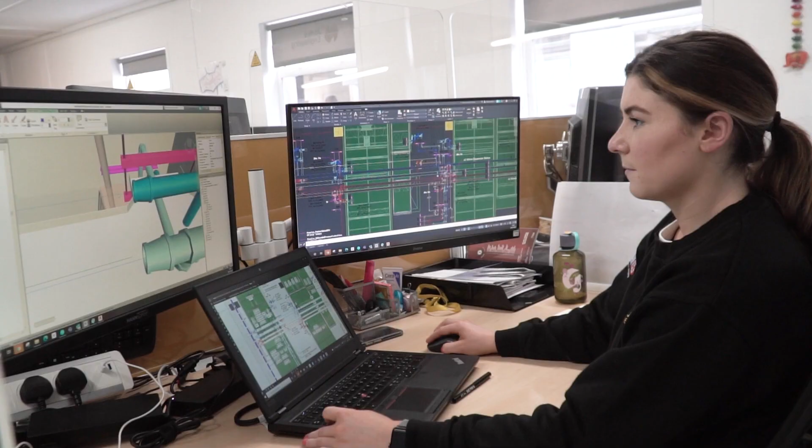So what you study in college is not exactly what you will work with. Technically, what I'm doing now is a lot of building services engineering, which I wouldn't have studied in college. So like heating systems, I would have done water flow, but I wouldn't have done the heating aspect. I would have done small aspects of it, but not at all.

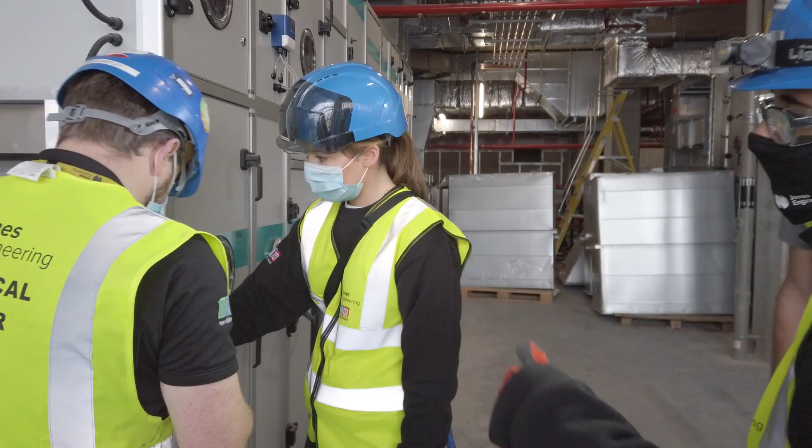So I think my advice to young engineers who are about to graduate is don't limit yourself in what kind of job or sector you've studied your engineering in. They're all quite versatile and flexible. You can switch from one side to another. It is going to take a bit of learning and getting used to, but you're well able to do it. Definitely just don't limit yourself to just your degree and only your degree.

My advice to somebody that's considering doing engineering would be, I think, just go for it. The options are limitless, I think, at that stage. You have to dream big. Don't limit yourself by what you think you can achieve, because I think with engineering you can achieve anything you want.

Yeah, I mean, there's not a person that asks you, what do you do? Oh, I work in the children's. Oh, the new children's hospital. Yeah, everybody knows what it is, and though they may not say it, everybody knows how important it is, I think.

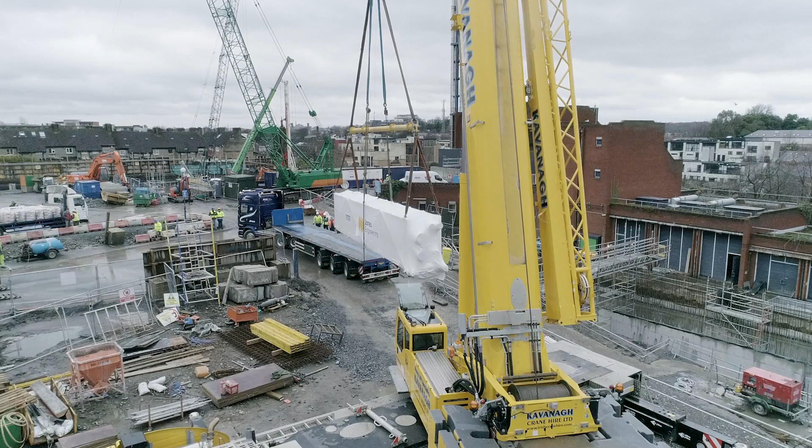And certainly, we started out 4 or 5 years ago with 3-4 people, and now there's an office here in Jones of 50 people plus the people who aren't even working out of this office. And there's a real, I would say, team spirit, a camaraderie, and a great structure that we have here. You know, it flows well, and I think everybody gets on with everybody else.

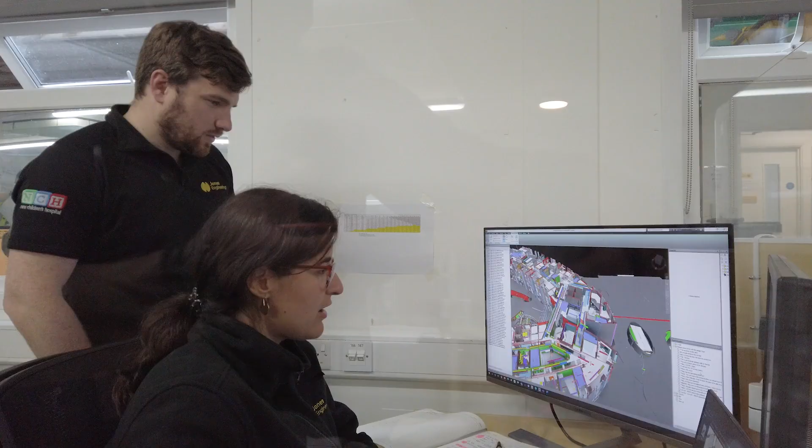And certainly from my own point of view, I went from being a relatively new junior engineer to the company to now being a project manager and working with several junior engineers below me, and it's a privilege really to be in that position sometimes, because you're guiding people, and it feels like it's important, you know.

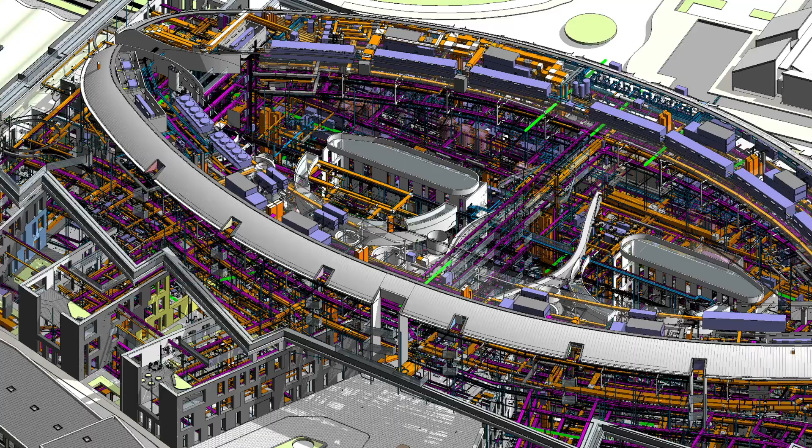Fundamentally, I think every day on this project you're learning something new, and as a result of that, it's certainly raising the bar, not just for this project, but for other projects that the Jones Group are doing at the moment, and also going forward. It will produce a whole new class of engineers that didn't exist within the company before, and whatever the next project is that we go on to, it'll really stand to them.

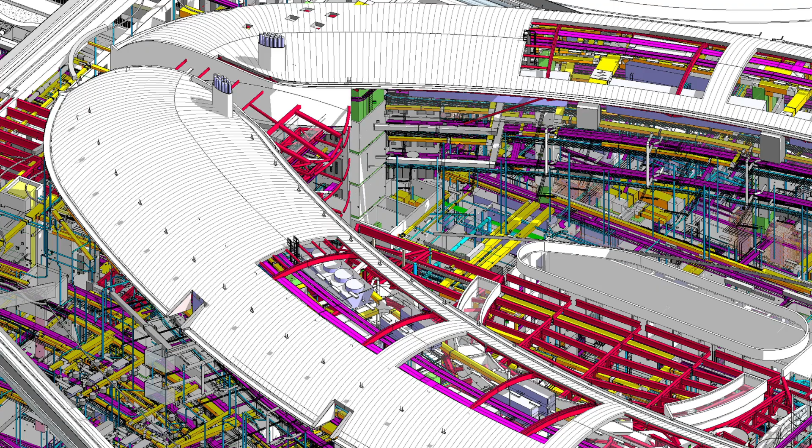I think what's really exciting to see on the project at the moment is when you develop a design and you see it on paper. One thing that's important to mention is that this whole building has been designed in 3D, using Revit, using BIM. That's pretty much par for the course nowadays, but bear in mind this project started in 2014. BIM was relatively new back then, so the design has been carried out in 3D, delivered through Revit, and the Revit models are then transferred over to the contractors at the stage where they get appointed.

And it's been really excellent to work with the contractors, to see them take our models and develop them through the fabrication process, through the construction process, to take our designs and turn them into something that's ready to be constructed. And that takes a lot of hard work, a lot of collaboration, a lot of good communication, a lot of patience.

There can be disagreements about whether something is going to work or whether something has been set out in the best way for the project, or whether a change is a good thing or not. And there can be conflicting interests at times. Emotions can get high, but we found a really good way to work with Jones Engineering, with BAM, with Mercury, and with other project stakeholders. There hasn't been a problem yet on the project that we haven't solved. It isn't easy, but we get there.

I've young kids myself, and I understand what it's like to spend time in the current paediatric facilities. They're just not fit for purpose anymore. The doctors, the nurses, the parents, the children of Ireland most of all, they deserve something better. And I think with this project, we as a team and we as a company are doing our part to try and help fix that situation.

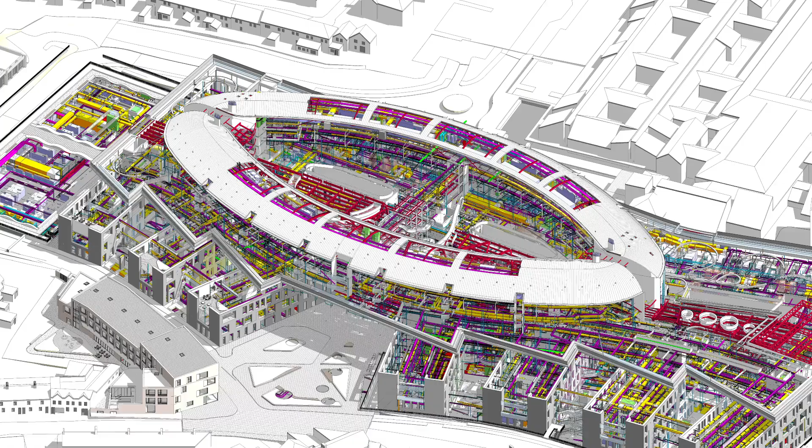This is a standout project in the career of any engineer. Technically advanced, it'll be one of the most architecturally striking children's hospitals in the world.